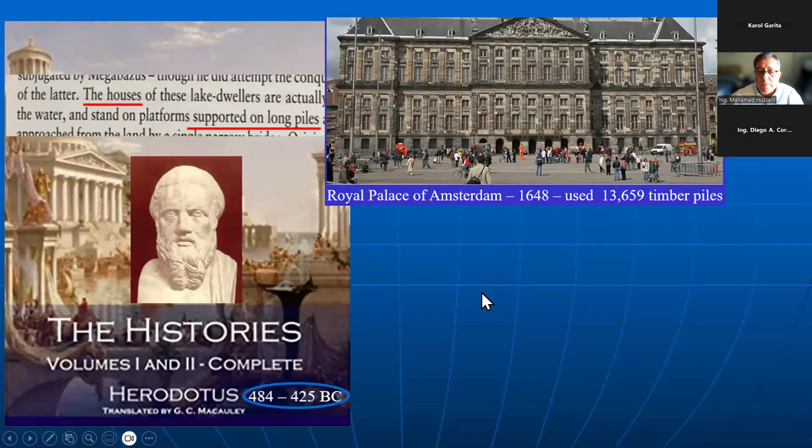Just to give you an idea of the progress we have had in deep foundations over the many years: in 1648, when they built the Royal Palace of Amsterdam, they used 13,659 piles. In 2010, when they built the world's tallest building, 160 floors high, in Dubai, they used only 194 piles. Great progress we are having.

The use of deep foundations in North America is said to have started with the invention of the skyscraper, the high-rise building that was first built in Chicago. This is the very first high-rise building built in Chicago in 1885, 10 stories, a steel frame building, and the foundations for which were hand dug.

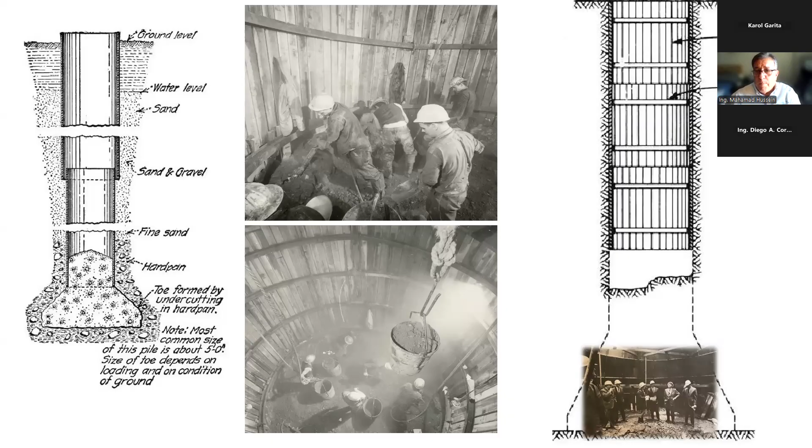They used to send people down into the ground to, by hand, by shovel, dig the foundation and then fill it with concrete. So this is one such foundation where they have an enlargement at the bottom, and they actually had an engineers' meeting, a project progress meeting, held at the bottom of one of these foundations.

In today's practice, we use deep foundations to support all kinds of structures in all types of geotechnical conditions, to resist all kinds of load combinations.

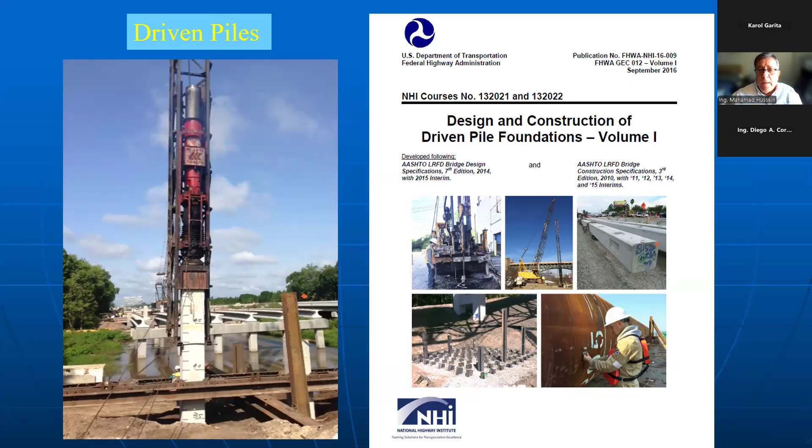They consist of driven piles, and there is a manual in two volumes, Design and Construction of Driven Pile Foundations, issued by the United States federal government, Department of Transportation. This manual was written by engineers in my company, GRL Engineers. They wrote the manual that everybody uses throughout the United States for the design and construction of driven piles.

At the end of the presentation, I will leave you my email address. If you're interested in these manuals, please send me an email and I will send you a link so you can download these manuals for free in PDF form.

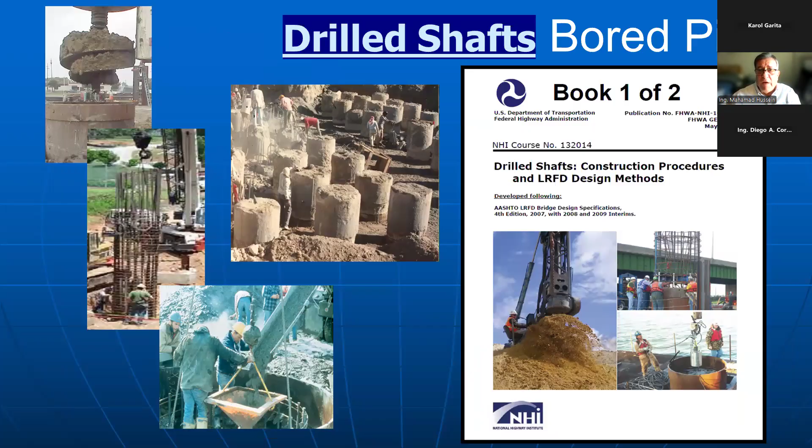So we have driven piles, auger cast piles, cast in situ foundations, for which there is also a design and construction manual I can send to you, as well as drill shafts or bored piles. There's also a manual in 2 volumes for that.

Driven piles typically consist of timber piles, concrete, and steel piles. Timber piles have been used for thousands of years. That's all we used to use for a long time. Now, in today's practice, timber piles are used to support small structures or as a ground improvement technique. There is a manual for the design of timber piles you can download for free from the Timber Piling Council.

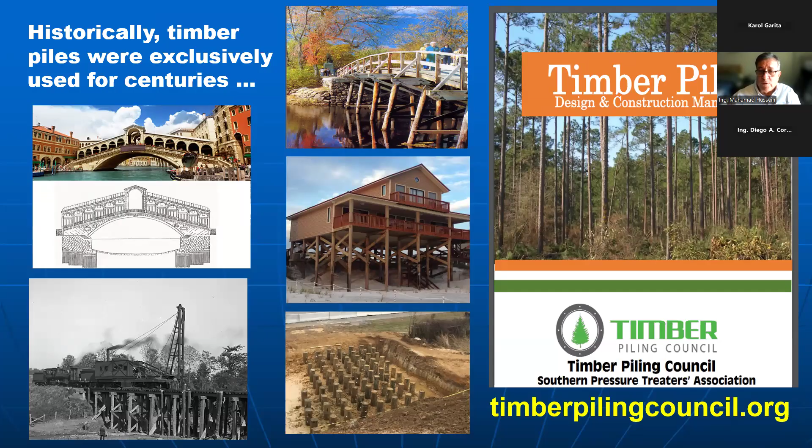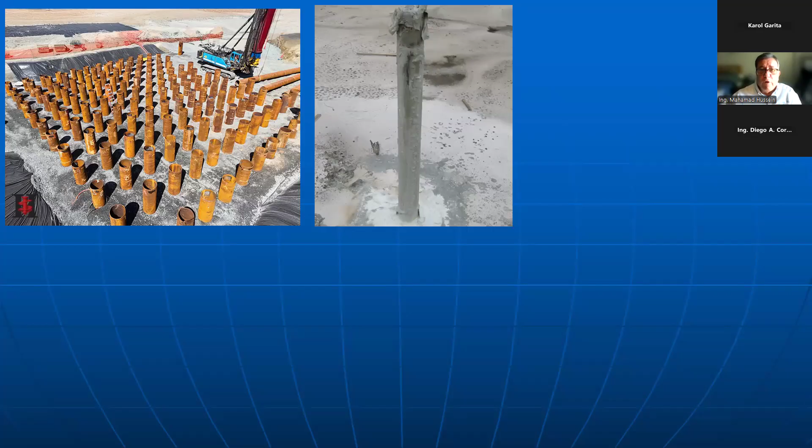Steel piles come in 2 varieties, H-pile and pipe pile. There are about 20 different H-pile sections, profiles, specifically made for foundations. They look like H-beams, but they are not structural H-beams; they are specifically H-piles made for foundation work. Pipe piles come in a variety of sizes, ranging in diameter from a few inches to a foot or two, to a few feet, to maybe more than 10 or 15 feet, depending on the need. So they range in diameter, in wall thickness, and in length.

For example, if you ever come to Florida and go to Disney, the foundations for the monorail piers - one of them went down about 100 meters, 350 feet deep. And also in Florida, we have piles that are 415 feet deep, about 130 meters, pipe pile long.

Pipe piles can be open-ended or closed-ended, and they can be uniform, tapered, or semi-closed-ended. So they can be designed depending on the requirements of the project.

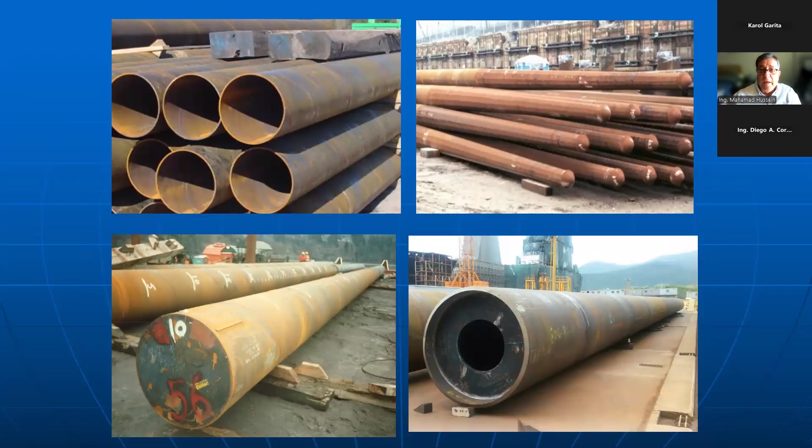One of the main advantages of steel piles is that they can easily be adjusted for depth and length, by welding to add length or by a simple torch to cut off. So if we have variable subsurface conditions, steel piles, H-piles, or pipe piles will be an ideal foundation solution.

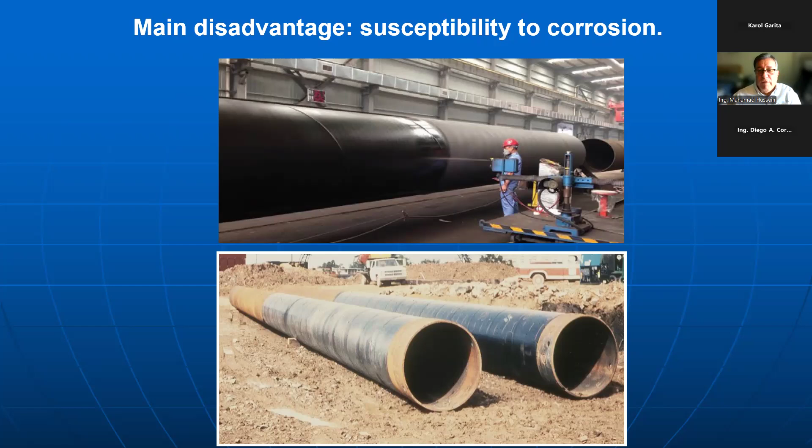The main disadvantage of steel piles is that they're susceptible to corrosion. For that reason, when steel piles are designed, sometimes they are coated with material in order to prolong their service life, and sometimes they also add artificial thickness - making it a little extra in order to account for the corrosion effect. In the manuals there are design tables for how much corrosion to expect and how to protect it with cathodic protection.

For offshore applications, or near shore for ports, harbors, offshore applications, steel piles are exclusively used. Steel pipe piles are exclusively used.

The other kind of piles we have is concrete piles, mainly pre-stressed concrete piles, typically square, pre-stressed concrete piles. We may also have post-tensioned cylindrical concrete piles. The pile will have to be cast in the casting yard and transported to the project site. On the project site, they can also be spliced, either by epoxy dowel splicing or by mechanical splicing.

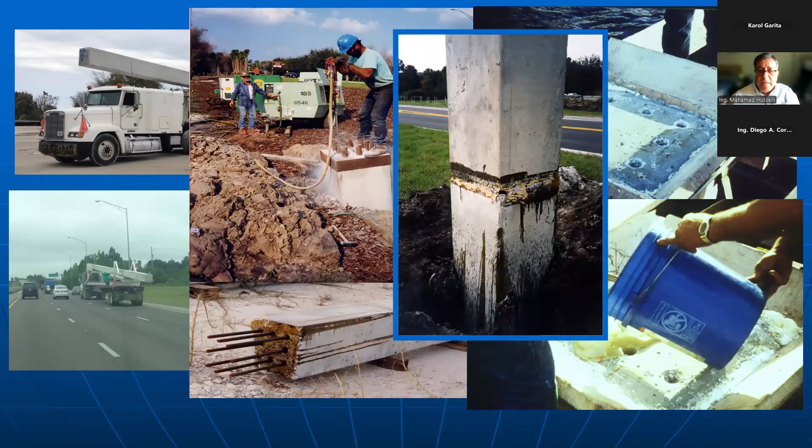If the pile is very large, like more than 24 inches on the side, then they make it hollow in order to reduce the weight so the pile can be handled with ease. There are design manuals specifically from PCI for the design of pre-stressed concrete piles that you can also download.

The newest addition to the use of concrete piles is the utilization of ultra-high performance concrete. This is the very first such pile driven. The strength of this concrete is 4 times the strength of normal concrete.

So while piles may be uniform and prismatic, they don't have to be. They can be highly non-uniform in cross-sectional profile along their length, and they can be composite, made out of more than one material in a variety of combinations.

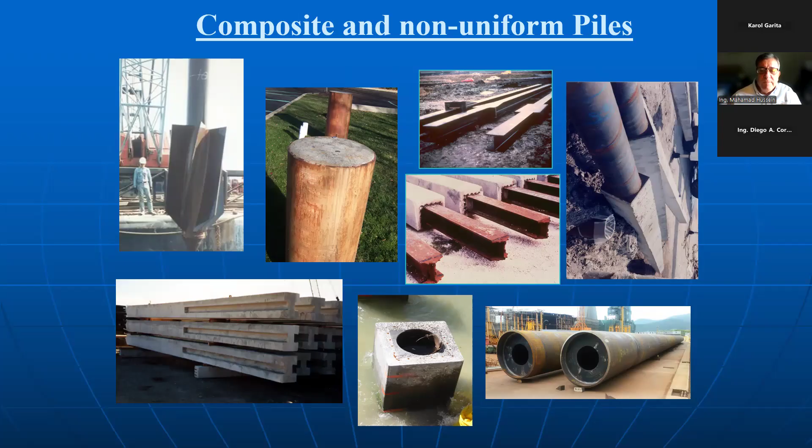There are many different hammer models and types - hydraulic hammers, air steam hammers, diesel hammers, single acting hammers, double acting hammers. There are hundreds of different hammer models available, from the very small to the very large, to drive these various kinds of piles.

So we typically drive piles one pile at a time into a pile group to make a foundation to support a bridge pier, for example, or a building or some kind of structure. To support the building, we need to know the pile's static load bearing capacity - how much static load the pile will be able to support.

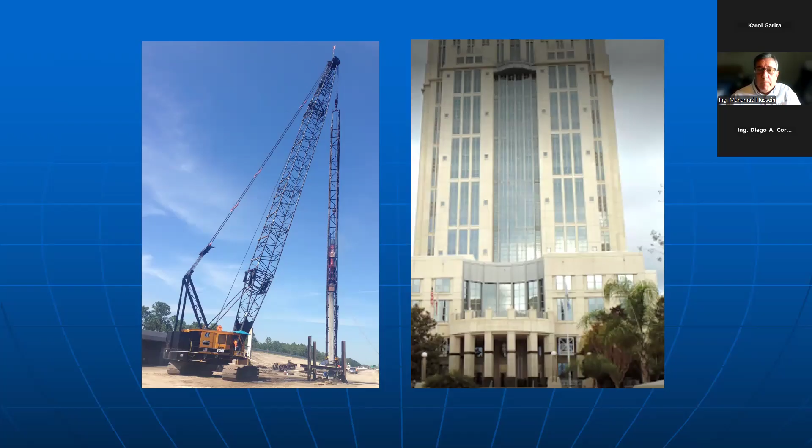The best way to evaluate the static load bearing capacity of a pile is by performing a static load test.

Static load testing can be performed by using dead weight or reaction piles, or a combination of the two, to support the reaction beam. Then we put a hydraulic jack on top of the pile, apply static load, and measure the corresponding pile top movement.

So this is a typical static load test result, load versus movement. Please keep this in mind, remember this, I will bring it up again later.

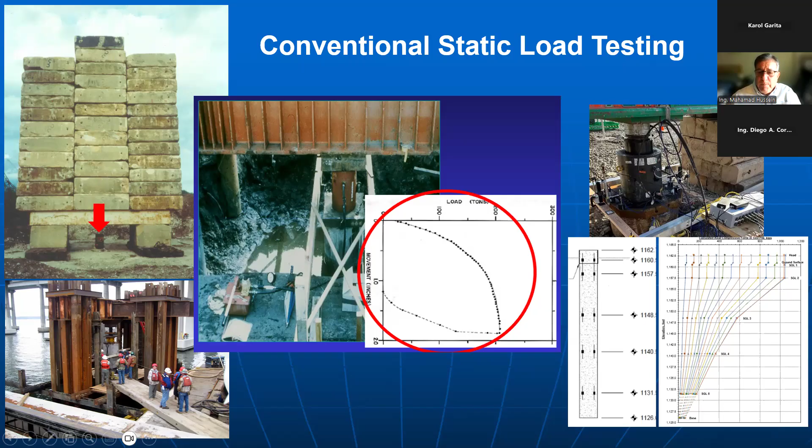To get more information, we may want to put strain gauges along the length of the pile and measure the load transfer between the pile and the soil versus depth. That will allow us to separate how much skin friction we have and how much end-bearing resistance we have during the static load test.

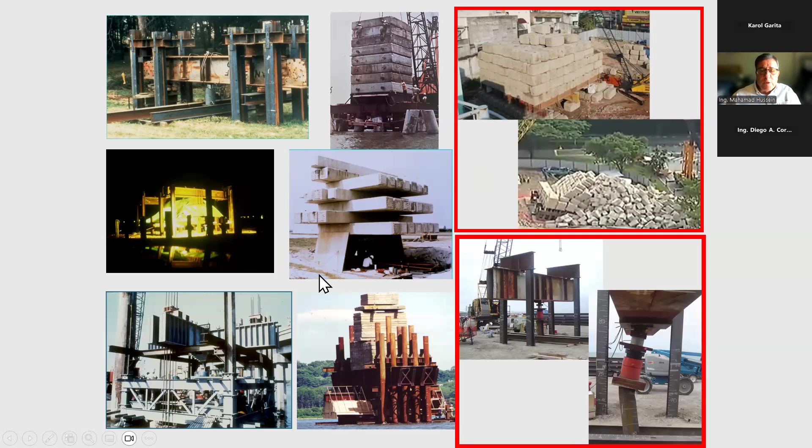This is great, it's the best thing we can do, but it has many limitations. Static load testing costs a lot of money and takes a lot of time to perform. We also have to be mindful of safety when we perform static load testing, whether using dead weight or reaction piles. These are very important limitations, which is why we do not do so much static load testing.

Also, very importantly, when we drive piles into the ground, we do not have much time between driving the pile and building the structure on top of it. So there's not much time to run a static load test. And if the project is over water, static load testing becomes much more expensive.

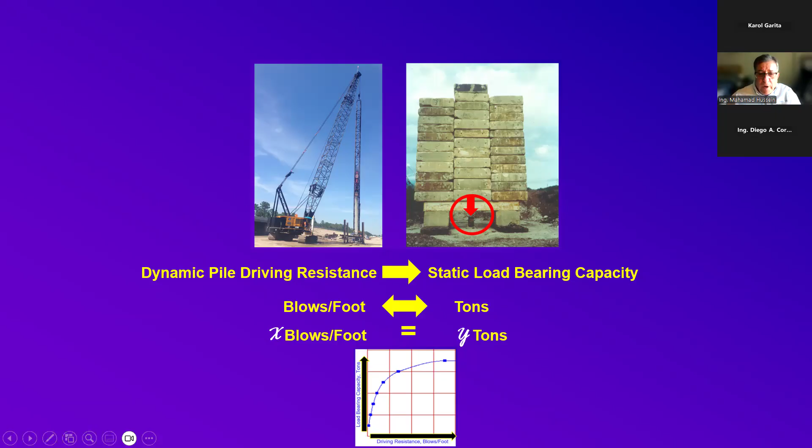So the challenge is: can we obtain the static load bearing capacity of the pile from information during pile driving? Can we relate the static load bearing capacity of the pile to its driving resistance under the hammer? Can we find a relationship between pile driving blow count, blows per foot, and how many tons of static load the pile can take? Can we quantify this non-linear relationship between pile driving blow count and static load bearing capacity?

For a long time, people involved in pile driving realized the relationship between the energy of the hammer, the load of the pile, and the blow count. If it takes a lot of energy, a lot of work to drive a pile into the ground, then the pile will carry more load.

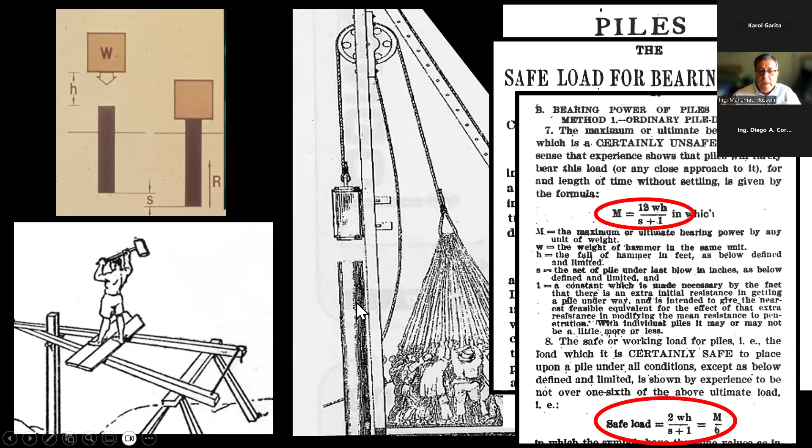Mr. Wellington, in 1888, wrote an article in the Engineering News magazine relating pile load bearing capacity to hammer energy and penetration under the hammer. We call this the ENR formula, ENR approach, or energy approach.

Many people tried to improve on that simple equation. But no matter how much they tried, back in 1888, in the 19th century, we only drove very short timber piles with drop hammers. Now, of course, we have much larger hammers, much longer, flexible, elastic piles, much more complicated lengths, penetration, and high loads. So applying 19th century technology to today's practice is not very effective and is not advised.

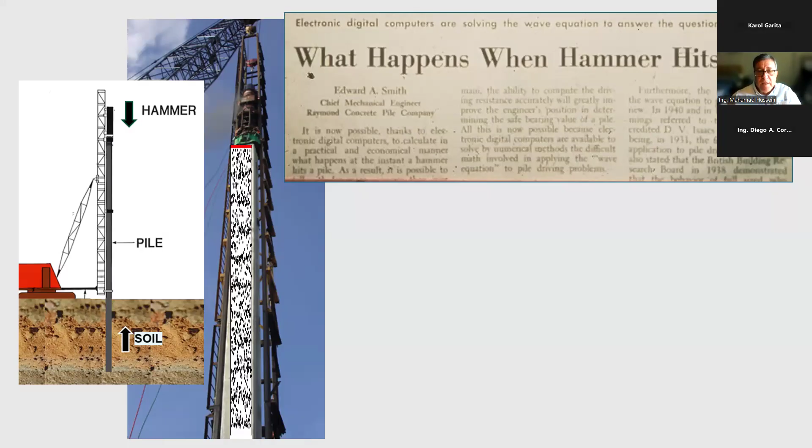So in the 1940s, Mr. Edward Smith, realizing that the dynamics of pile driving under the hammer are better represented by stress wave mechanics, noted that when the hammer impacts the top of the pile, it generates a stress wave that travels down the pile length back and forth very fast, like 5,000 meters per second, inside the pile, but finite.

Mr. Smith wrote a computer program utilizing the wave equation, the second order differential wave equation, to apply to the stress wave in the pile. He called his program the wave equation analysis of pile driving.

This program that Mr. Smith wrote in 1948 is often cited as the first program in civil engineering, the very first program anybody wrote for civil engineering application using the digital computer, for pile driving dynamics.

Mr. Smith wrote the program for use inside his own company only, Raymond Concrete Pile Company. Then the United States government commissioned our group, GRL, to write a public domain program so the public can use wave equation analysis. This program is called GRLWEAP, and it is promoted by the company Pile Dynamics.

Wave equation analysis is a computer simulation program that uses numerical methods to evaluate pile drivability. It's a very powerful program that relates pile driving blow count to pile load bearing capacity. This is good information because we can give that to the pile driving inspector on the job site.

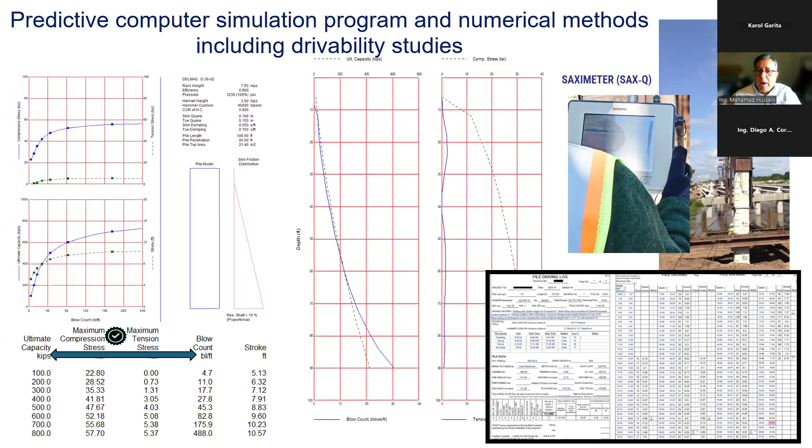The inspector will have a pile driving criteria for blow count, so many blows per meter, to make sure that every pile is driven to the required blow count to achieve the required ultimate load bearing capacity of the pile. They do that utilizing equipment called a saximeter, meter of sound, that listens to the pile driving hammer, and then it tells you blow count and the pile capacity from the criteria.

So while it's a very powerful program, it's a simulation program. It's computer analysis by simulation. It relies on assumptions. The analysis engineer has to assume many parameters to build up the model inside the computer. That is why it has potential sources of error, because it is based on assumptions.

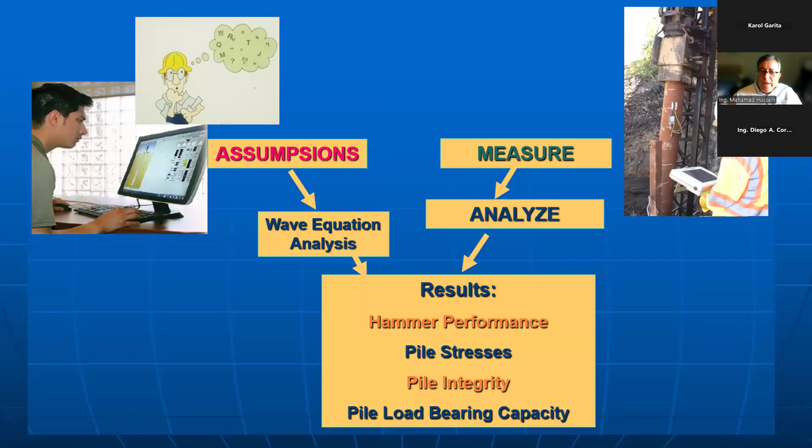So the same engineers who wrote the program thought, what if we take measurements? We go to the job site and perform measurements, and we analyze the measurements instead of assuming parameters and information. So we measure the information we need and we analyze it to come up with the results.

They invented all of the equipment, the sensors, the gauges needed. They invented the computer to analyze the data on the job site, and also they invented the formulas, the equations needed to analyze the measured data. And they showed during the research good correlation between the prediction of static capacity of the pile from dynamic measurements and actual static load test.

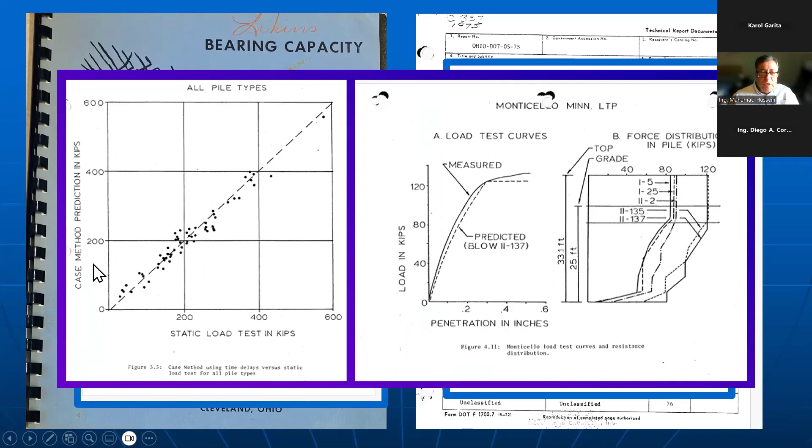Later on, the equipment used during the research had been shrinking down. So now, dynamic testing, 50 years later, is performed all over the world using equipment called Pile Driving Analyzer and software called CAPWAP. CAPWAP is a wave equation analysis that uses measured data from the pile driving analyzer as input. No need for assumptions - we measure what is needed and analyze it on the job site.

So let's start from the beginning. This is static load test. We need all of this dead weight because we need to perform static testing. So what if we were to do it differently?

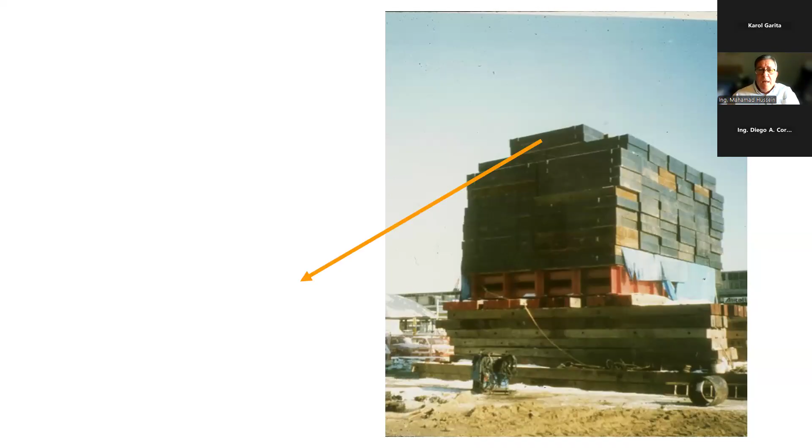If we were to take a small portion of that, a small piece, put it in a guide, lift it up high enough and drop it so that it produces the same load on the pile as all of this weight - that is the difference between static load testing and dynamic load testing.

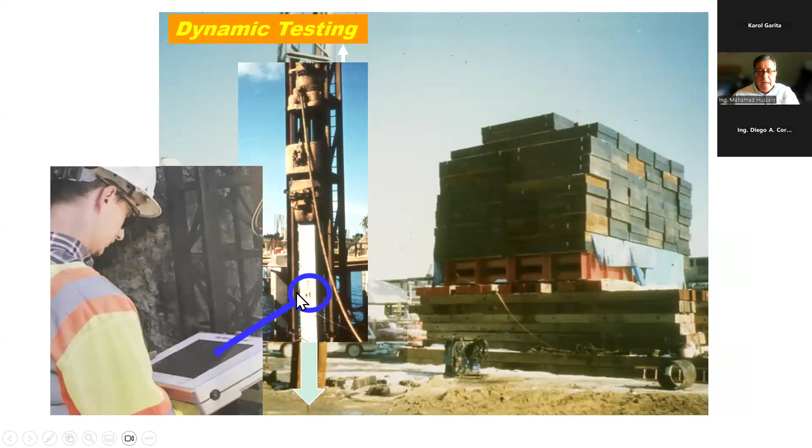The pile driving hammer provides a dynamic test load. So all we have to do is put sensors, put gauges on the pile, and then we can perform dynamic load testing. No need for static testing. We can perform dynamic testing during pile driving.

This is done through ASTM standard D4945. Testing can be performed with a testing engineer standing there on the job site, or it can be done completely remotely using SiteLink technology with a satellite link. The equipment sends the data to the test engineer anywhere in the world in real time during pile driving - remote testing, remotely.

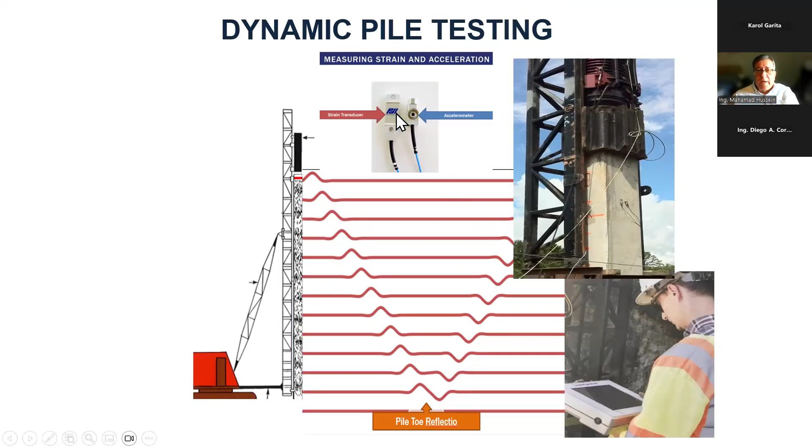So dynamic pile testing is a measurement of load and movement of the pile under the impact of the hammer, and the analysis of these measurements utilizing stress wave mechanics, elastic one-dimensional stress wave mechanics. Load is measured with strain gauge, and movement of the pile is measured with accelerometer. These are very small instruments, only about 10 centimeters, reusable, and they can be attached to any kind of pile - pipe pile, H pile, concrete pile, timber pile, as well as cast-in-place foundations like bored piles or auger cast piles.

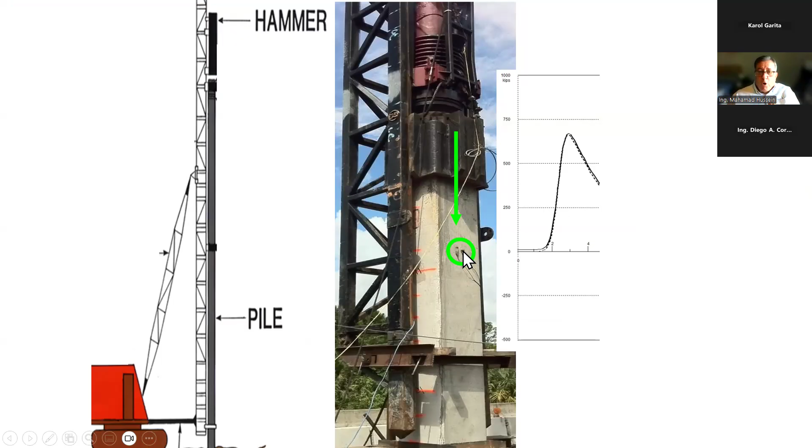When the hammer hits the top of the pile, the stress wave is generated. When the stress wave goes by the gauge location, the gauges sense a quick rise of force and movement of the pile. Then the stress wave travels down the pile length to the bottom, reflects, comes back, and we see the reflection. So this is data from one measurement, one impact, one hammer blow, showing impact and reflection at the pile top. We take this every blow.

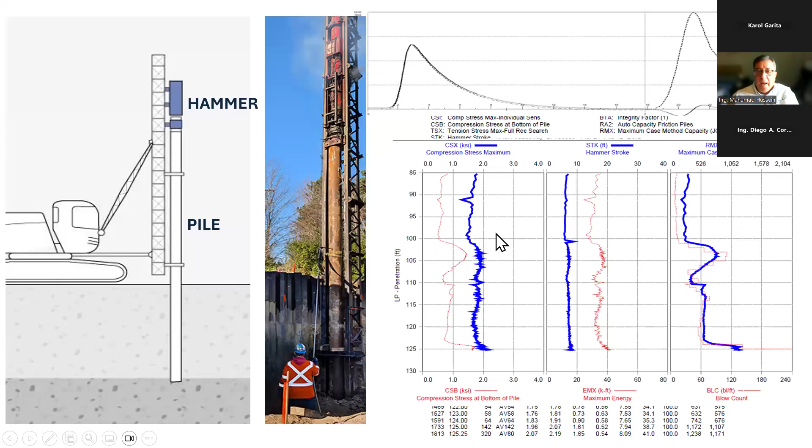These results can be shown in table form, also in graphical form. Versus penetration depth, we see the compression stress on the pile, tension stress, the energy of the hammer, the static load bearing capacity versus depth, and the blow count versus depth. So it is a complete test record during the driving of this one pile, done on the job site in real time during pile driving. The information can be used to analyze the hammer, pile, and soil.

Analyzing the hammer is very important because we measure the energy received by the pile and compare it to the maximum energy of the hammer. We see that this can be highly variable. It can vary—maybe the pile only receives 10%, 20%, 30%, or 80%. It could be anything. So we have to quantify the efficiency of the hammer because we are using the pile driving blow count to evaluate pile capacity.

Why does it vary so much? Why is it so low or so high? That is because it depends on the mechanical condition of the hammer and the state of maintenance of the hammer system and its various components.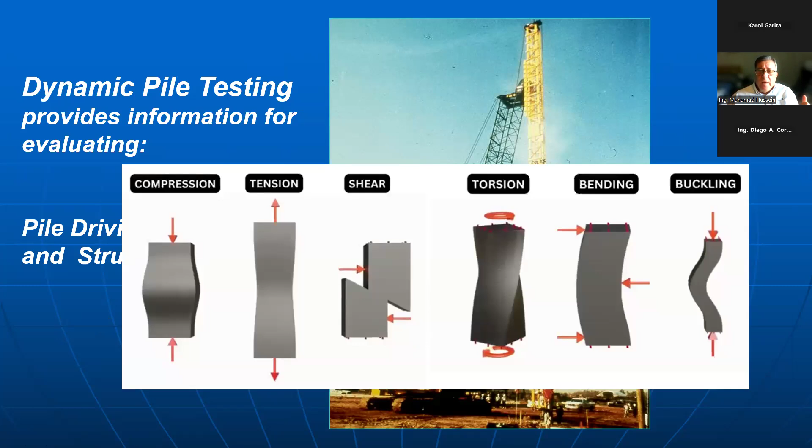When the hammer hits the pile top, the pile undergoes a very complex state of stresses, including compression, tension, shear, torsion, bending—all kinds of stresses. These stresses sometimes damage the piles. Piles may be damaged on the top, but by taking measurements, we are able to measure the stress and limit and eliminate the cause of the damage by reducing the energy of the hammer.

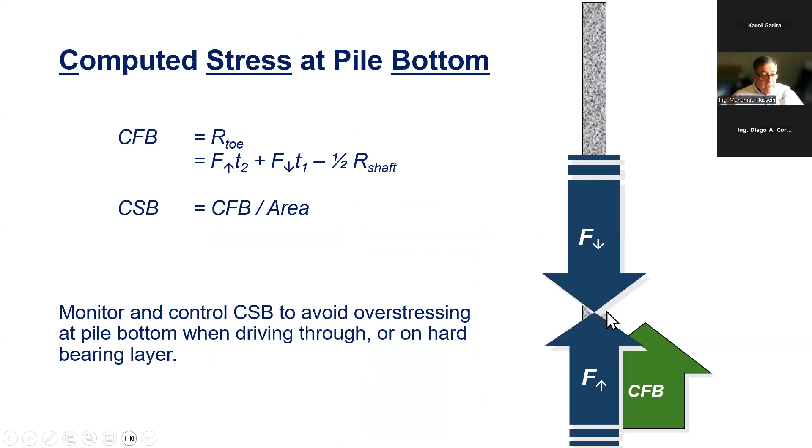So even though it's measurement only on the top of the pile, we can calculate from the top measurements the stress at any location along the pile length, including the bottom, because the bottom of the pile stress may be twice that on top of the pile.

So when we drive piles to a hard layer, notice no damage up on top. But when we extract the pile, we have pile damage at the bottom because of too much stress there, due to end-bearing resistance and reaction in the pile. Also, during easy driving, the pile will have tension stress that may crack concrete piles.

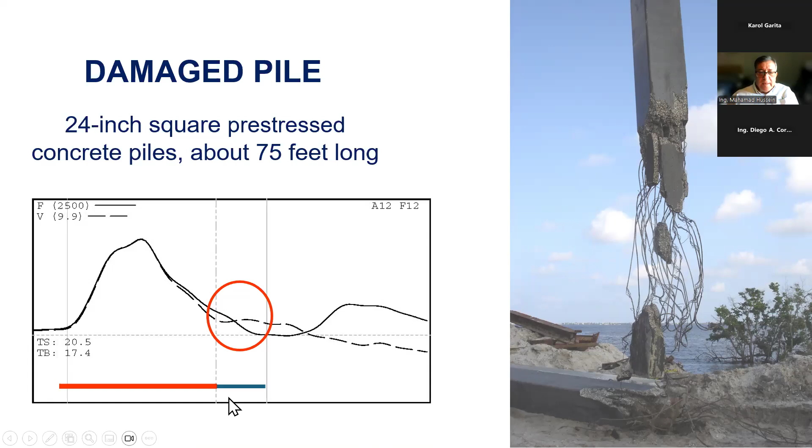So when we have damage on the pile, this will send back reflection that gets registered in the pile top record we measure with the PDA. Early reflection in the data indicates damage on the pile. Here we see concrete pile damage, and here we see steel pile damage. So the PDA, the pile driving analyzer, will calculate the location of the damage and the amount of the damage along the pile length.

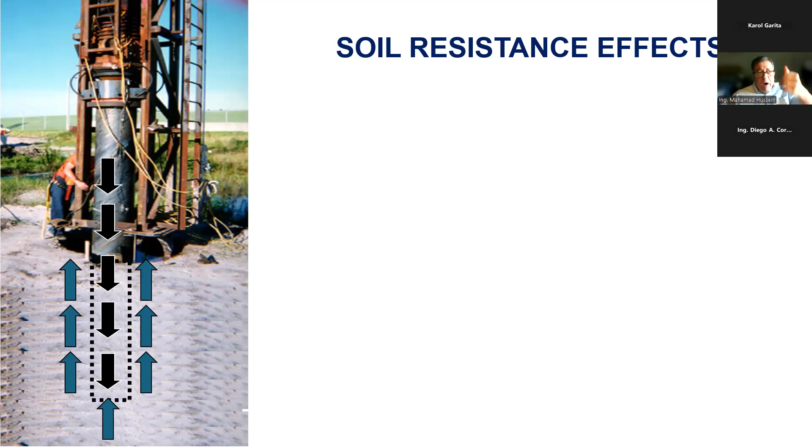So we talked about hammer performance and pile performance. Now, soil performance. When the hammer impacts the pile, the pile moves in the ground, and the pile movement activates soil resistances. So now we have two waves on the pile: the wave going down from the hammer, and the wave going up from the soil. Both of these waves are measured at the gauges by the PDA.

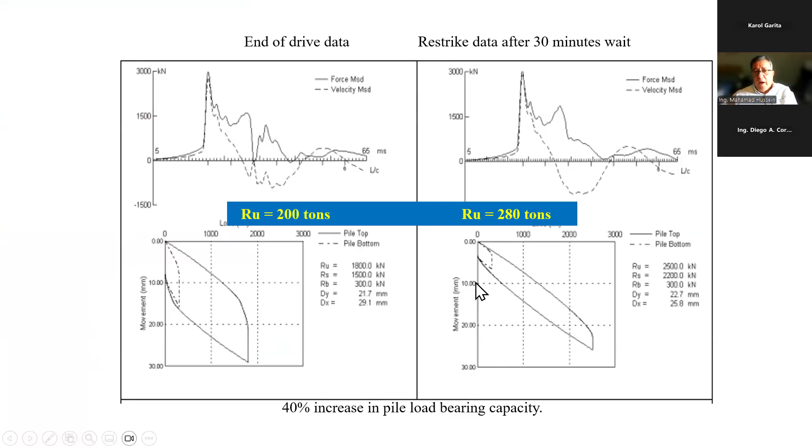So the PDA, under each hammer blow, measures the wave going down the pile from the hammer and the wave going up the pile from the soil. From these reflections of the stress waves of the soil resistances, we are able to resolve them into skin friction distribution along the pile length and end-bearing resistance during pile driving under each hammer blow. Testing can be done during initial driving and later in restrike to study the setup effect—increase of pile capacity with time, setup, or decrease of pile capacity with time.

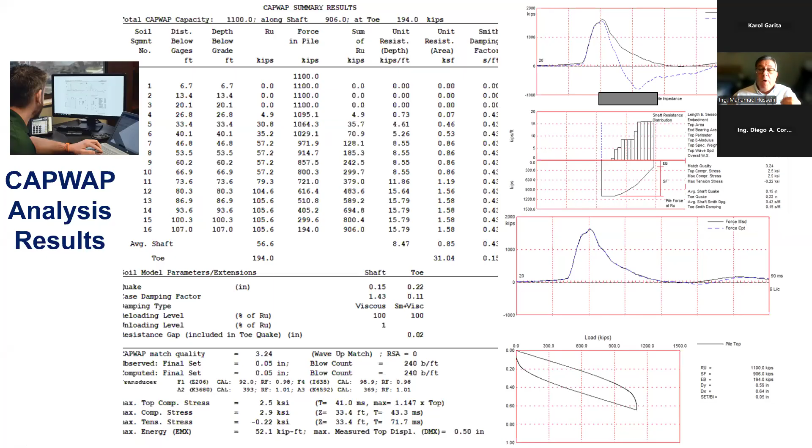It's called relaxation. We can then put the measured data from the PDA into the CAPWAP analysis software program, which uses a sophisticated pile-soil interaction model with signal matching analysis technique to come up with the skin friction distribution along the pile length, and then we can simulate load versus movement. Remember, I mentioned we would talk about load versus movement—now it is not from load testing, but from dynamic measurements.

So under the impact of the hammer, measurement with the PDA and analysis with CAPWAP, we can simulate load versus movement, load test. How good is that? How does that compare to full-scale load test?

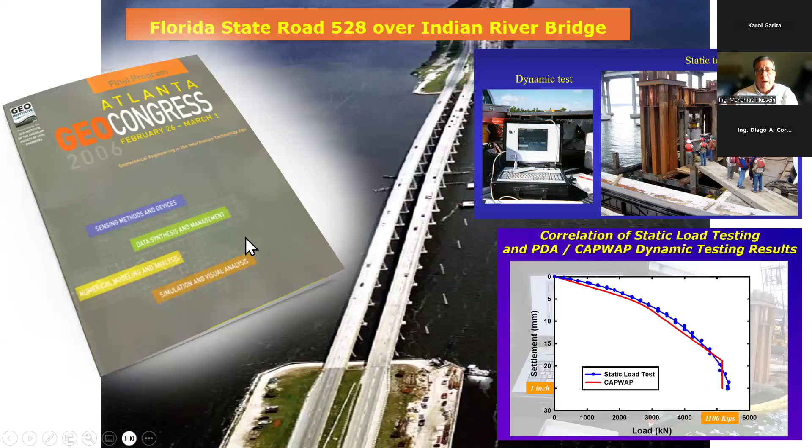There have been many studies. This is a case history paper published by ASCE showing excellent correlation. And this is another paper, also published by ASCE, also showing excellent correlation between simulation from PDA measurement and actual static load test.

So engineers can use dynamic testing on a test pile program on a few piles at the beginning of the project in order to establish production pile length for the job, establish production pile driving criteria, also to check on the engineer's design assumptions, and also to check the contractor's equipment and means and methods.

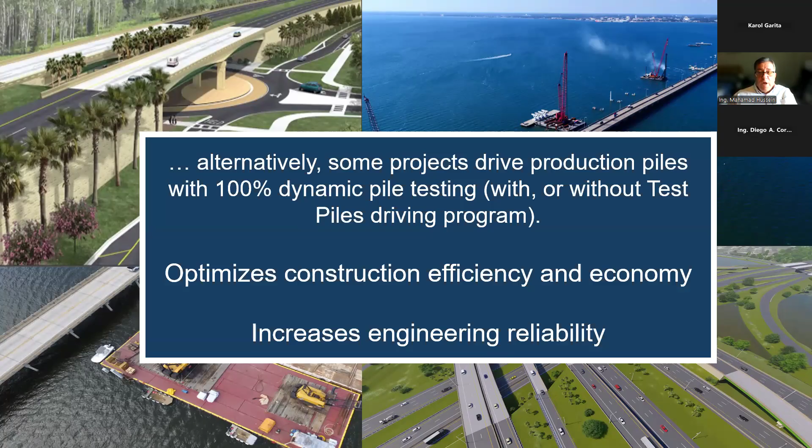Alternatively, recently projects are now using 100% testing. Every pile on the project is tested with PDA. The state of Florida now, every pile for the highway department is tested 100%, every pile on the project. They found that it optimizes construction efficiency and economy and increases engineering reliability.

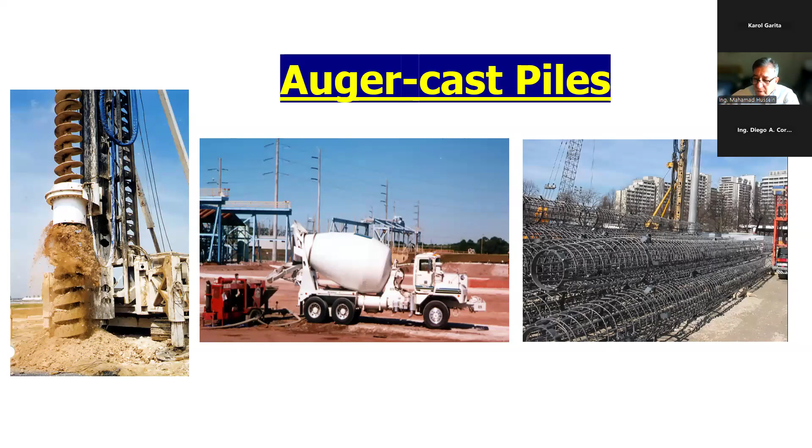Dynamic testing can also be used on other kinds of deep foundations, not only driven piles with a hammer, but also helical piles or micro piles. All we have to do is bring in a drop hammer and hit the pile to perform dynamic load testing, including testing of cast-in-situ foundations, cast-in-place deep foundations, including auger cast piles that are used now to support buildings and bridges - all kinds of foundations, auger cast piles.

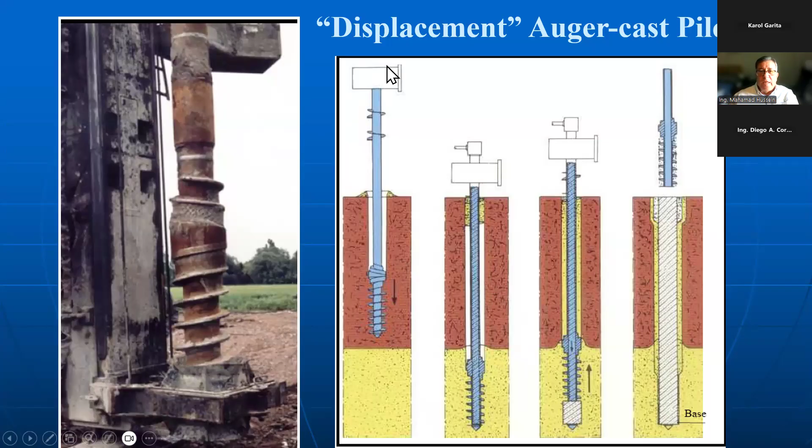They're constructed using a continuous flight, hollow stem auger, by drilling the hole in the ground, filling with grout, and pushing in the steel cage, or by using equipment where we displace the soil in the ground - a displacement kind of cast-in-place auger cast pile. The equipment to construct these piles is fitted with instrumentation during pile installation that measures the grout volume, the auger depth, grout pressure, and torque, in order to make sure that every pile is constructed properly.

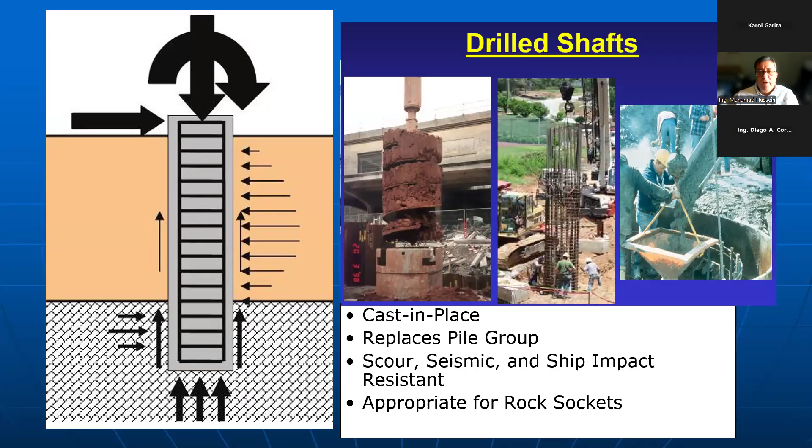Drilled shafts are another type of deep foundation, cast in place, typically very large - maybe 1, 2, 3, 4 meters in diameter, 25, 50 meters deep. They are usually used to support very large structures and very heavy loads in axial loading and also in lateral loading. The beginning of using drilled shaft foundations started in the 1930s in Texas as an outgrowth of the oil industry.

So they take one auger and drill a hole in the ground looking for oil. If they find oil, great. If no oil, then they fill it with concrete and make it a foundation. The Texas Highway Department started using this for their bridges in the 1950s. In Florida, they started using drilled shafts for bridges after the first bridge in Florida collapsed from ship impact.

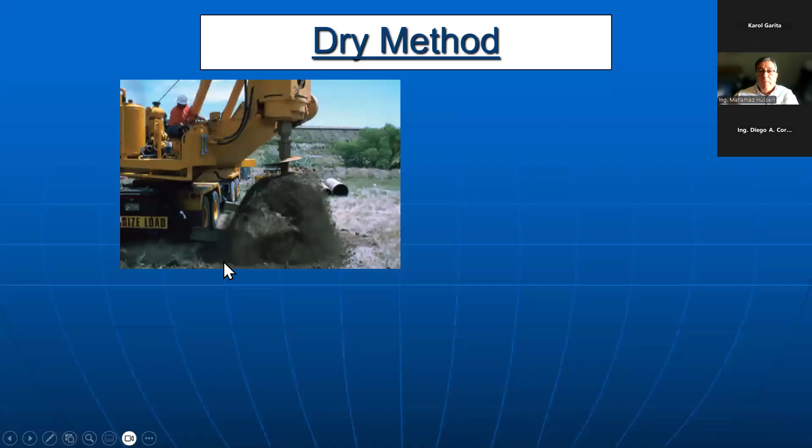So if the water table is very low, we can drill a hole, look down it, put in a steel cage, and fill with concrete. If the water table is high, we have to use steel casing, steel pipe, either temporarily during construction or permanently as part of the constructed shaft. Or maybe we use slurry - a heavy liquid we put in the hole to exert hydrostatic lateral pressure so the wall of the hole does not fall during construction of the drilled shaft.

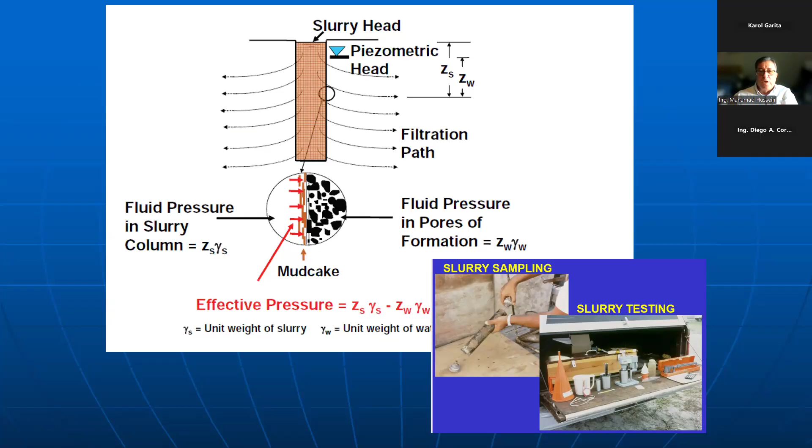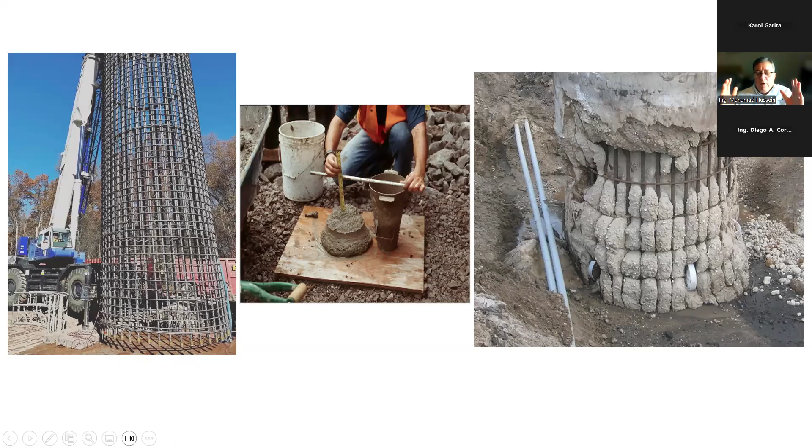So now we have a hole full of slurry, and we have to fill it with concrete. We do that from the bottom up. For that, we use a tremie pipe - very long, the length of the pile. We take it all the way down and fill it with concrete from the bottom, and we collect the displaced slurry on top. The bottom of the tremie pipe must always be inside the concrete. If it goes outside the concrete, we will have a problem with the integrity of the shaft. The steel cage and the concrete have to be designed so that the concrete will go through the steel cage in order to engage the side of the hole, giving us geotechnical skin friction resistance.

So when we drill the hole, we have to inspect it. We have to inspect the hole for the profile of the drilled hole and the verticality, the plumbness - we have to drill a perfectly plumb hole. We also have to check for the cleanliness and the competency of the bottom of the hole for end-bearing resistance. We do all of these inspections before we put the steel cage in the hole and before we put in the concrete.

The hole profile and verticality are checked with equipment called SHAPE, per ASTM standard D8232. SHAPE is electronic equipment that we send down into the hole, even inside the slurry.

We send it into the hole. It sends out signals and waits for reflections, allowing us to draw a 3D picture of the drilled hole, showing the verticality or off-plumbness and the offset between the bottom and top of the hole, to make sure it is within design tolerance. It will also calculate the volume of the drilled hole.

This is very important because later on, when we put concrete in the hole, we have to make sure that the volume of concrete we use equals the actual volume of the drilled hole, not the theoretical hole, but the actual hole as we drilled it. Very important.

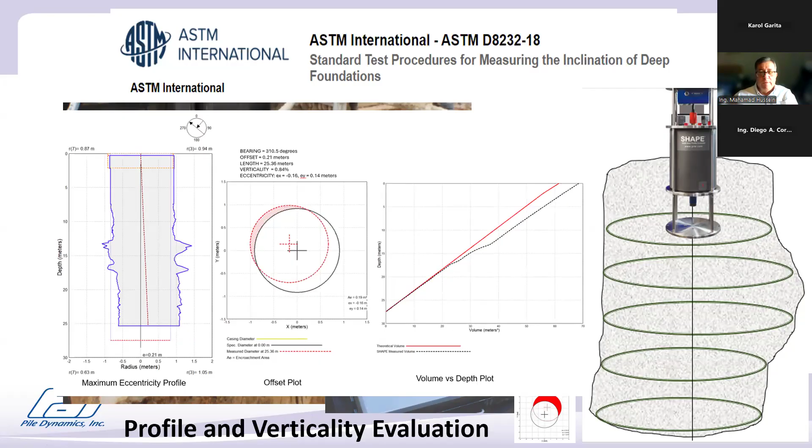We also measure the cleanliness and competency of the bottom of the hole, to make sure we do not have loose material or debris that would affect end bearing of the drilled shaft. We do this inspection with equipment called SQUID, Shaft Quantitative Inspection Device. It has three small penetrometers that we push into the bottom to measure the thickness, strength, and stiffness of the material, ensuring the bottom of the shaft is clean enough to allow for end bearing.

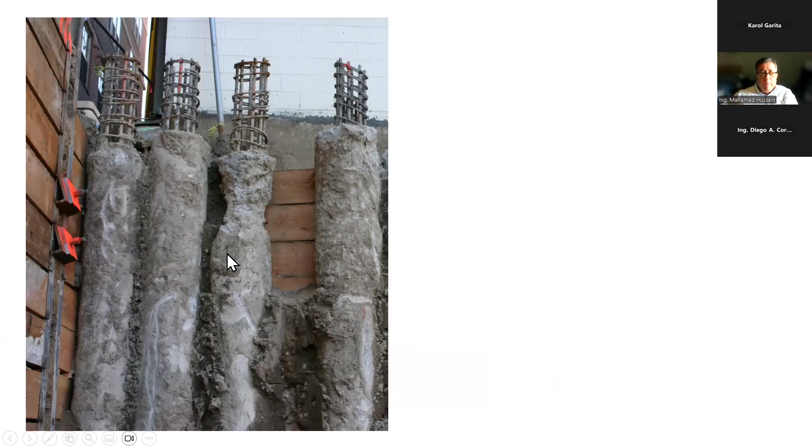So we do the inspections and the construction, and the constructed shaft may be perfect, or maybe good enough, but sometimes it will have serious problems. So now we have to check for integrity. There are many factors that affect the integrity of a constructed shaft in the ground, including subsurface conditions, design, installation methods, and workmanship.

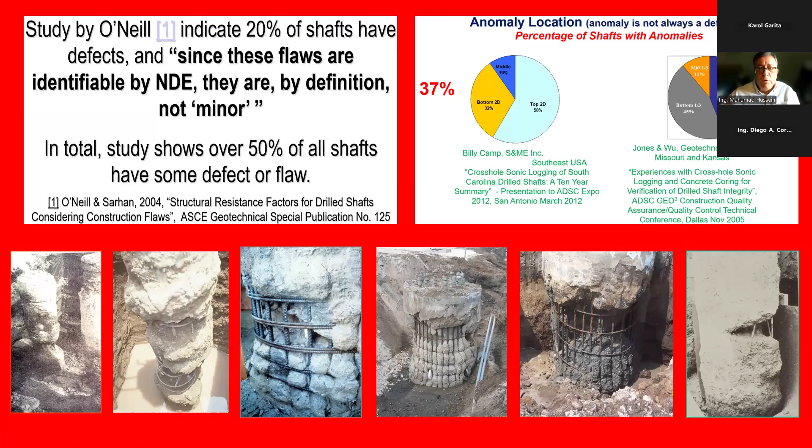Very important. There have been many studies done all over the United States by universities, highway departments, agencies, owners, and consultants, and they found that many of these deep foundations in place have some kind of structural issue.

The oldest method, maybe 50 years old now, to test for integrity is PIT, low strain pile integrity testing, ASTM standard D5882. That uses the impact of a small hammer to send a low intensity, low strain wave down the shaft and back up. We measure on top of the shaft the impact and the reflection from the bottom of the shaft.

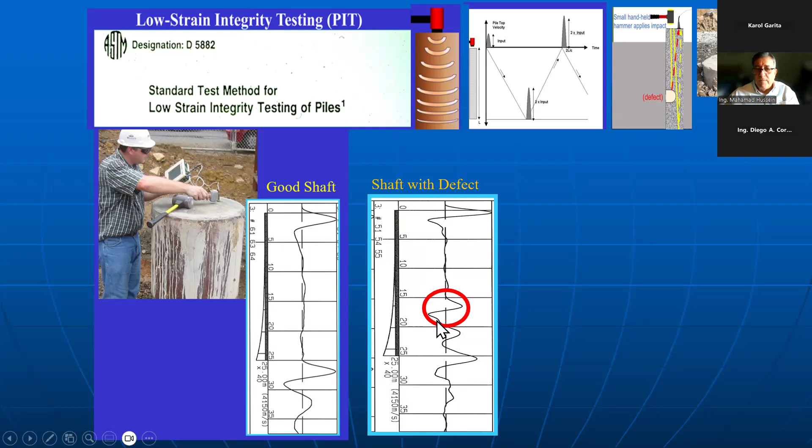This is impact and reflection from the bottom of a shaft 25 meters long. Good data means a good shaft. This data is not so good, and the shaft has a defect at 15 meters, out of a total shaft length of 25 meters. At 15 meters we have a reflection indicating a defect. We can analyze this data and try to quantify the location of the defect along the length of the shaft. This is the first technology, the first testing for integrity assessment.

Very old, and it has many limitations.

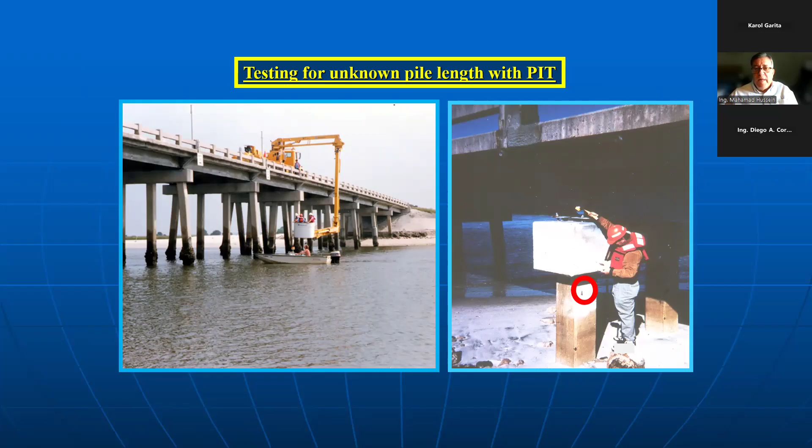This type of testing can also be performed to determine the unknown length of piles already in service, for example for scour studies, load rating, or bridges and buildings where the pile foundation length is not known. You have maybe a 50-50 chance of having good data, for many reasons and limitations.

The next test method is called CSL, cross-hole sonic logging. It's much better than the previous PIT method, but more involved. To perform this ultrasonic test, CSL, ASTM D6760, we have to cast access tubes, 1.5 inch diameter, into the shaft. Then we need equipment: a transmitter and receiver so we can scan, a depth encoder, and the equipment and engineer on the job site.

So we cast these small diameter steel access tubes into the steel of the shaft, and then we take them two at a time, sending a signal from one and receiving it at the other. We scan between these two tubes, many scans between pairs of tubes. The number of scans we can have is n squared minus n, over 2, where n is the number of tubes. So for a 5-tube shaft, we can do 10 profiles.

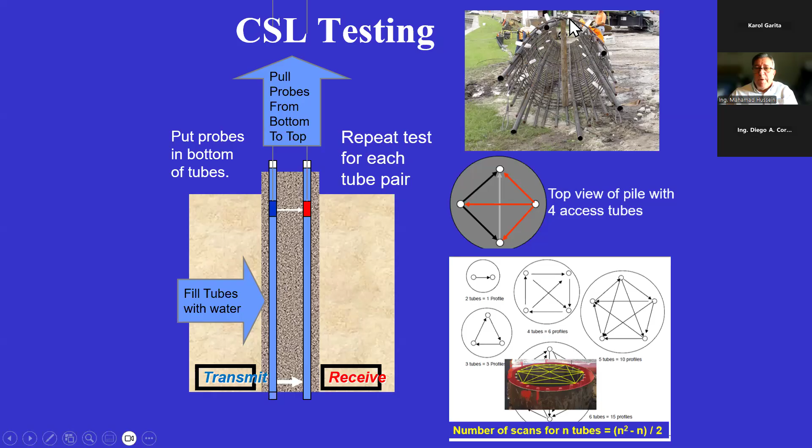The number of tubes needed equals the diameter of the shaft in feet. A 5-foot diameter shaft needs 5 tubes. So when we send the signal from one tube to another, we receive it in that tube.

If we have good concrete, the signal is received well. If we have a defect between the tubes at a certain depth, that defect will delay the signal and weaken the energy. We send signals every 5 centimeters.

So we may have a shaft that is 25 meters long. Every 5 centimeters, we send a signal, so we can stack them. We put the signals, color coded green and black, on top of each other.

So this is the result of the CSL test on the left-hand side between these two tubes. This shaft has 4 tubes, so we take 2 tubes, and this is a scan between the 2 tubes. Good looking data, no problem.

The data in the middle, between the other tubes, shows we have a defect in the middle of the shaft, and on the right-hand side we show that we have a defect at the bottom of the shaft between those 2 tubes. So between the various tubes, we see where we have defects at what depth.

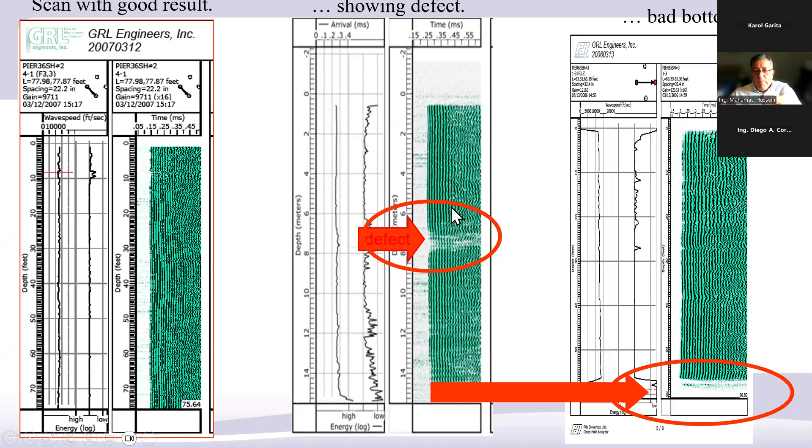We can put all of this data from different tube scans into a 3D tomography program that will show us the 3D picture of the defects inside the drill shaft, inside the steel cage of the drill shaft. So much improved over the PIT method.

However, it has its limitations. We have to wait maybe 5 days or more for the concrete to cure, otherwise we will have bad data.

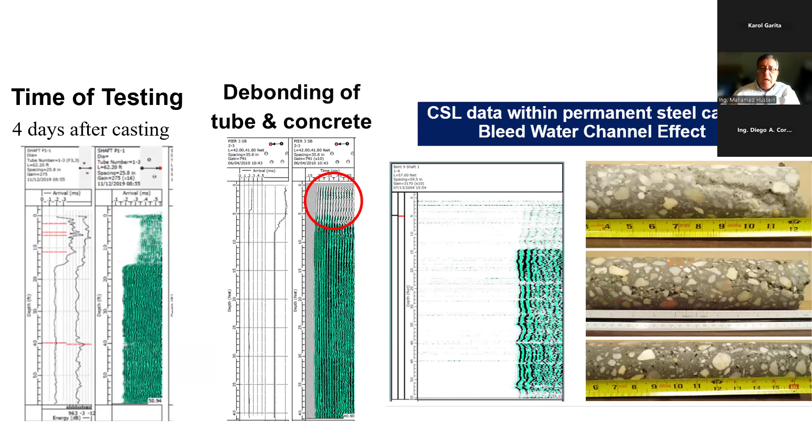The access tubes we need for the test may debond from the concrete, and that will give us bad data. If we use steel casing, that will also give us bad data. Many reasons to have bad data with this test.

Also, this test will only see defects inside the steel cage. So this is a styrofoam defect we put inside, and then we put concrete and test with CSL, we can see it inside. But if we put the defect outside, we cannot see it in the CSL test.

So, many limitations. The newest method for integrity testing is the thermal integrity profiling. This is the best method for integrity testing of bore piles and drill shafts, ASTM standard D7949. The Thermal Integrity Profiling (TIP) method relies on the measurement of the temperature of the concrete inside the ground,

inside the drill shaft, during the curing process. The temperature is measured using a thermal wire that is attached along the length of the reinforcing steel cage. Every 30 centimeters, every foot, we measure temperature, and we put many wires around it.

The number of wires needed equals the diameter of the shaft in feet. So for a 4-foot diameter shaft, a 1.2 meter diameter shaft, we need 4 wires. And we take measurements around the shaft and versus depth.

We know that because of the chemical reaction, the cementation reaction of the concrete generates heat. This heat can be very, very high, 2 times, 3 times the temperature of the ground. So we can get the heat signature profile of the shaft that we can use for assessment of integrity.

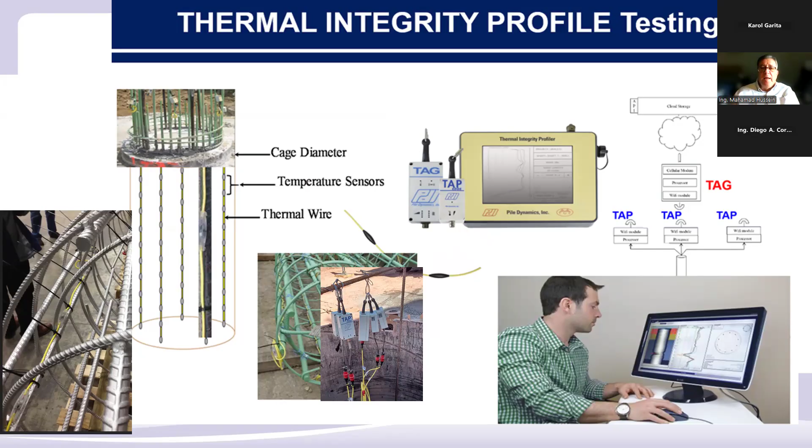So if we have a drill shaft and we have a localized defect at a certain location, it will produce a localized reduction of temperature. If there is no reduction, then the temperature is not changed. If the concrete changes, then the temperature changes also. So a localized defect will produce a localized reduction of temperature.

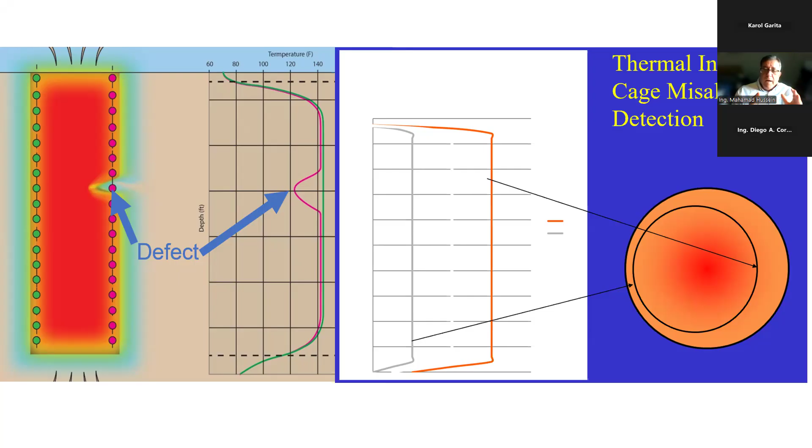Furthermore, if we compare the temperatures along the length of the shaft on one side of the steel cage to the other, and we see that one side always has more temperature than the other side, this will tell us that the steel cage has shifted inside the concrete, because one side is hotter where it's closer to the center, and the other side is cooler, closer to the soil.

So from this information, we are able to draw a 3D picture of the concrete profile, the defects, and also the location of the steel cage inside the concrete, to make sure that we have enough cover.

The same temperature measurements can also be used to assess and evaluate the integrity of barrettes and diaphragm walls in the ground. This technology of using temperature measurements to evaluate integrity of deep foundations is so innovative that it had won many innovation awards from ASCE, DFI, and many organizations in the United States.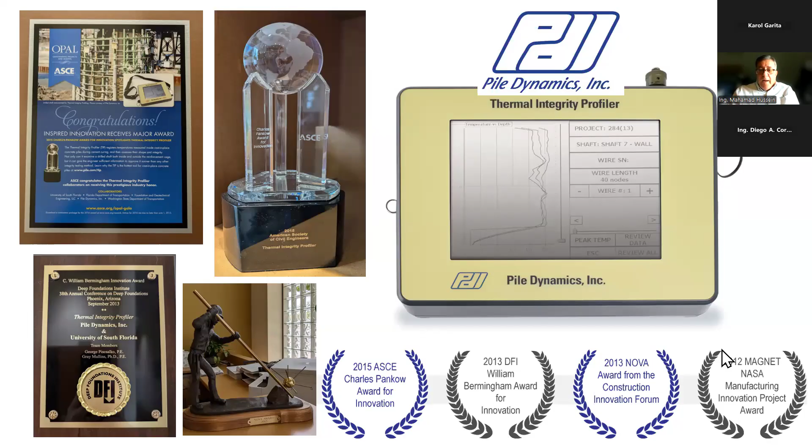So we talked about integrity testing, low strain testing with a small hammer. Small hammer impact will tell us something about integrity, but nothing about load-bearing capacity. To test for load-bearing capacity, we need to perform high-strain testing.

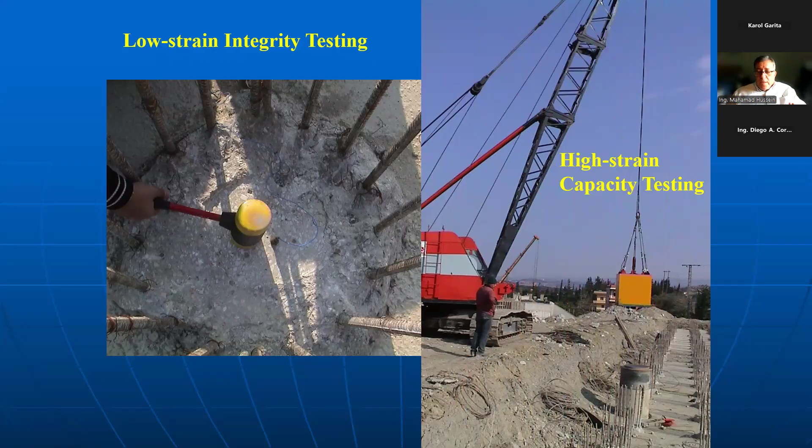To perform high-strain testing, we need a bigger hammer, big enough to impact the bored pile and move it against soil resistance so we can measure load-bearing capacity. How big should the hammer be? It depends on the size of the bored pile and the load. The drop hammer weight we need is equal to 2% of the load we are trying to test. If we have to test this pile to 1,000 tons, we need a 20-ton drop hammer.

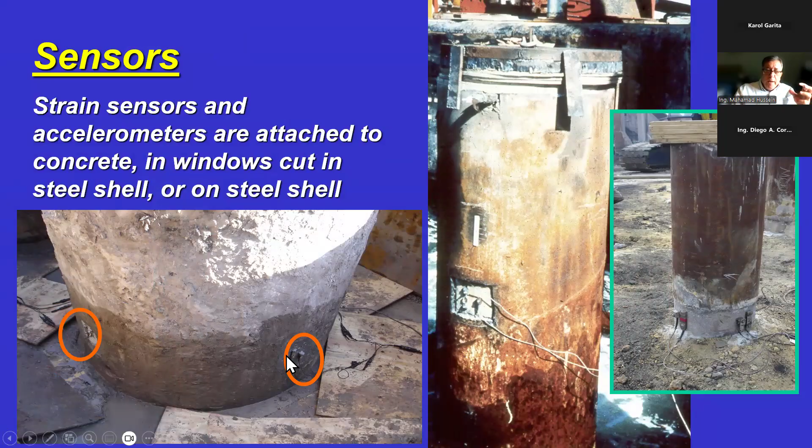So we can bring in a drop hammer and put instruments on the pile, or we can use a load cell. We can attach the accelerometer and the strain gauge. We can measure load and movement like we do with the pile, or we can put a load cell under the hammer on top of the drill shaft or bored pile and take measurements.

So we can perform dynamic measurements by hitting the bored pile or cast-in-place foundation with a drop hammer. That allows us to measure the wave going down the pile and the wave going up the pile with the PDA, and do dynamic testing.

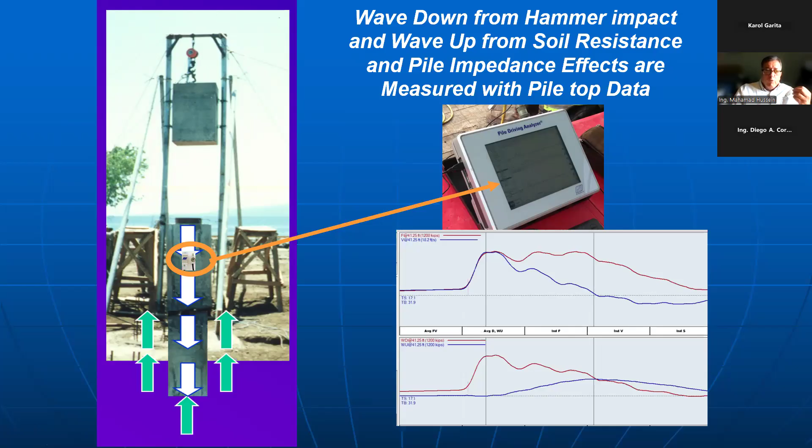This is an excellent picture because it shows that this contractor was required to perform a load test on this bored pile, drill shaft. He decided to perform dynamic testing, not static testing. He knows the weight of the hammer is 2% of the load, so he manufactured the hammer on the job site using the same concrete, and made this drop mechanism to perform the testing. He performed this load test on the job site for practically no cost, very little cost, very economical to perform this dynamic testing on the drill shaft.

So when we have a drill shaft and we impact it with the hammer, we have reflection from soil resistance. We also have reflection from the shaft being non-uniform. So non-uniformity of the shaft will also send back wave reflections. What we're going to do is take the profile of the shaft from the thermal wire and put it as input into the program, so that way we can account for the non-uniformity of the shaft when we analyze the soil resistances for more accurate analysis.

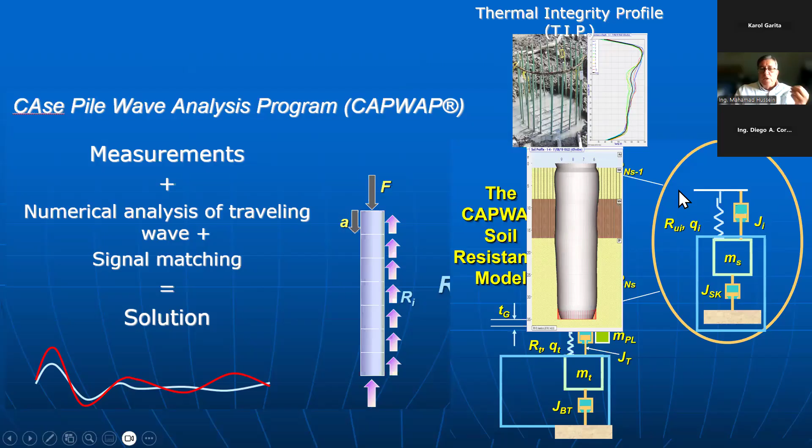So we can then use the dynamic test by drop hammer on the drill shaft, using the profile of the shaft from the thermal measurement, to come up with load movement of the drill shaft simulated by dynamic measurements, without having to perform static load testing.

So this is static load testing, conventional shaft-top static load testing, ASTM standard D1143. We need to put this reaction beam because we need to put this hydraulic jack on top of the pile, on top of the shaft, to perform top-down static load testing, conventional testing, in order to obtain load versus movement. That is why we need so much dead weight or so many reaction piles to hold the reaction beam in place to perform conventional static load testing.

A very smart professor, Professor Jorj Osterberg, invented a method to put the hydraulic jack at the bottom of the drill shaft. He called it the O-cell, the Osterberg cell, or Professor Osterberg load cell. That way, we do not have to have reaction weight. We only put the load cell on the bottom of the drill shaft.

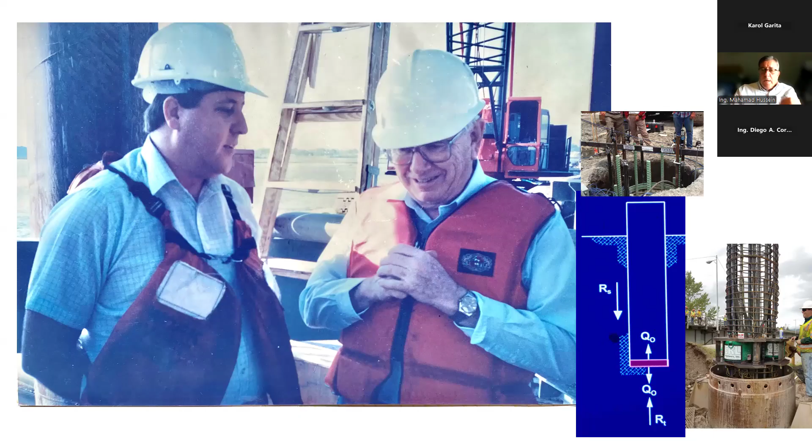Professor Osterberg passed away, and the patent on his invention expired. So now we do not call the test the O-cell test anymore. We call it bidirectional static testing, ASTM standard D8169, bidirectional static testing.

This engineer is performing a static load test, full-scale static load test on this drill shaft. Nothing up there, everything is in the ground. So this is how this test is performed.

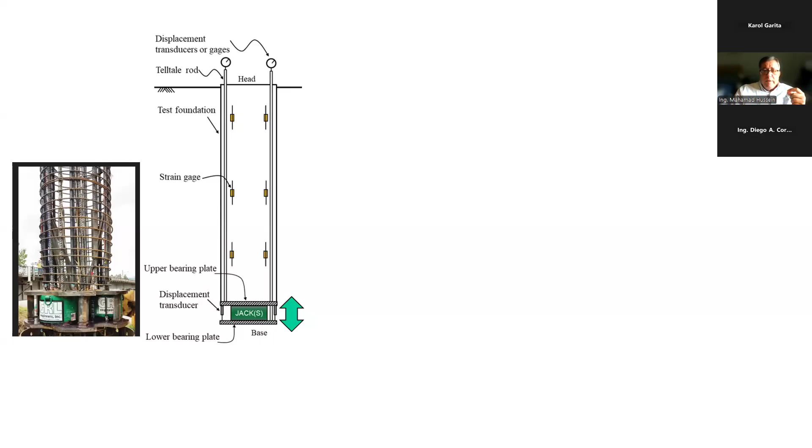We put the hydraulic jack at the bottom of the shaft and apply load. Then we measure movement of the shaft: up in skin friction, and down in end bearing. We apply load on the x-axis, and we measure movement up in skin friction and movement down in end bearing. We apply more load, we measure more movement.

We apply more load, we get more movement until either skin friction is fully mobilized and fails, or end bearing fails. In this case, skin friction failed. At this time, the test is finished.

Therefore, the maximum load we can use this testing for is equal to 2 times the minimum of skin friction or end bearing. That is why sometimes they move the location of this load cell into the body of the shaft, in order to have more load to test for: skin friction above, skin friction and end bearing below, to have more load to test to.

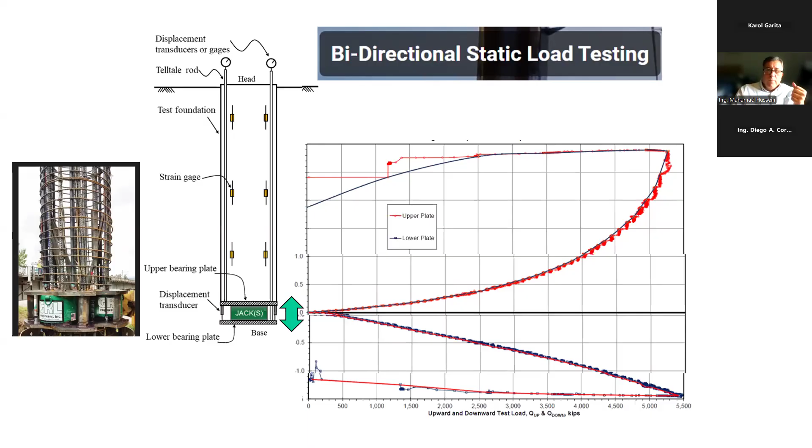We can take this data, the measurements at the bottom of load versus movement in skin friction, load versus movement in end bearing, and convert it into an equivalent shaft-top conventional loading by simulation. So from the measurement at the bottom, we can simulate a load test as if we had loaded the shaft conventionally from the top using reaction weights.

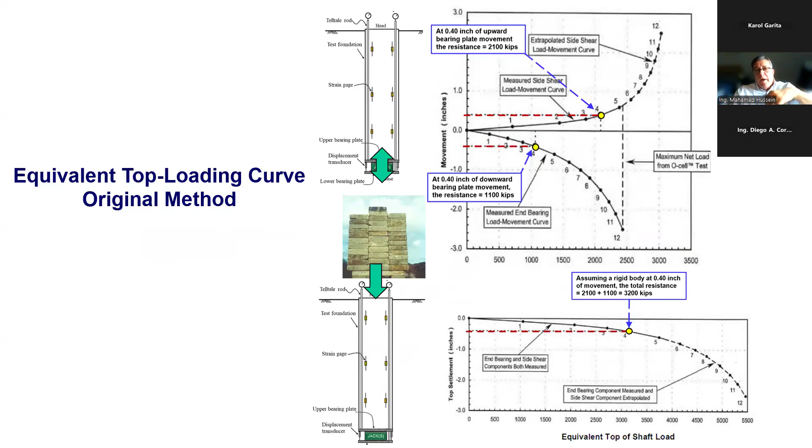So whether we perform dynamic testing with a drop hammer, full-scale static load testing with reaction weights, or bidirectional load testing on these bored piles or drill shafts, the drill shaft has to be instrumented with thermal wire, because we need to know the actual profile of the shaft in the ground, not the theoretical shape, in order to make sense of the load test data.

All of these tests I explained today are widely available in standards, codes, specifications, textbooks, reference books, conference proceedings, academic dissertations, theses, and technical papers. There's much information out there on the basic principles, applications, limitations, and use of all of these test methods I described to you today.

These test methods are all manufactured by Pile Dynamics and are used by GRL engineers. We are located in Cleveland, Ohio, United States, with offices throughout the United States and worldwide. All of the equipment I described to you today is either invented or now produced by our company, Pile Dynamics. We manufacture and sell all of this equipment. Our sister company, GRL, is a consulting engineering firm that performs field testing utilizing all of this equipment.

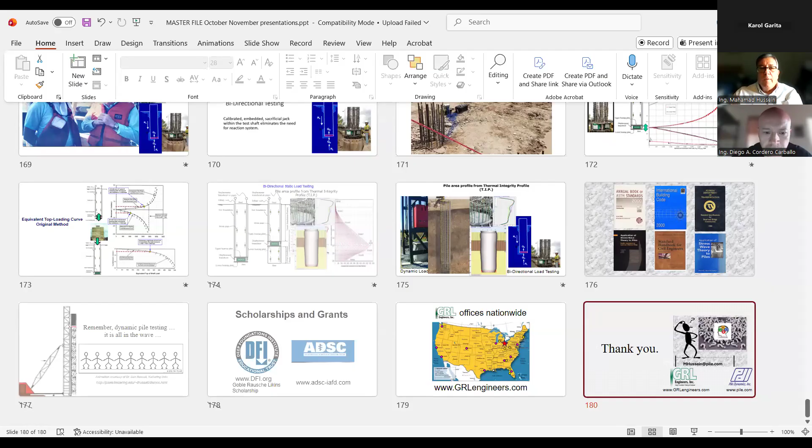Okay, thank you. There's another question. It says, thank you for your presentation. I would like to ask if there is any difference using the transient response method or PIT, measuring the hammer impact force and the pile head motion for evaluating the pile integrity.

Excellent question. The PIT method as I showed it, I showed it in the time domain, which means that the data shows the impact and reflection in time or in distance domain. The same data can also be analyzed in frequency domain, which is called the transient method. Basically, it is using exactly the same data to present it in two different ways, either in the time domain or in the frequency domain of the components of the measurements. They both give you the same information because they are both based on the same exact measurement, only presented differently, whether in time domain or frequency domain.

I hope I answered your question. Yeah, I think you did. And a last one, it says, test for lateral loads in piles in ports. I guess they're asking for information for lateral load testing. As far as I know, for lateral testing, static testing is the only test that is available. There is no dynamic test for lateral testing. And what is typically done is they take two piles and they test them against each other laterally.

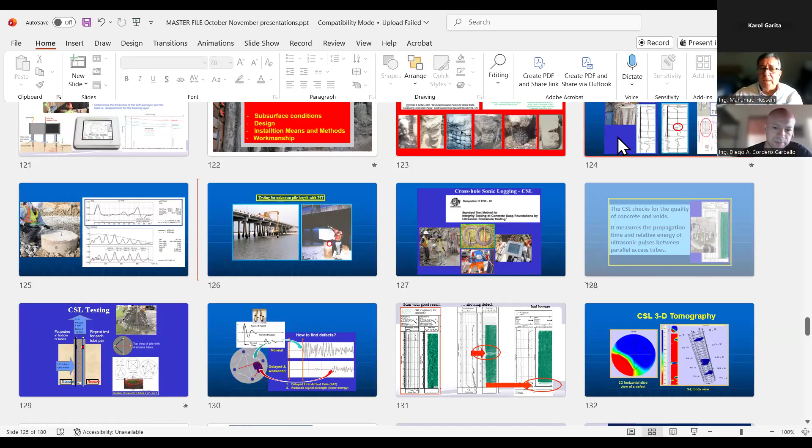Yeah, this is the impulse response, basically the PIT pulse echo method. So the impact and the reflection, the pulse response. That's typically what is referred to as a low strain test method, either by the time domain or by the frequency domain. But my understanding, this is what is referred to, is this low intensity impact, small handheld impact hammer test.

Okay, thank you. Okay, there's one more coming in. It says, using PIT for an existing pile, do you need access to the pile top, or can you perform the test laterally? What is typically done if you have a pile cap? You do not need access, although having access is best, but you do not have to have access to the very pile top, and you do not impact it sideways.

And this is one of the reasons I mentioned that you only have a 50-50 chance of having good data for this, because when you apply that impact up on top of the pile, the stress wave goes on any other component of the structure, as well as it reflects back and forth within that cap that will affect the measure on the pile. So even if you were to impact the pile itself, the impact will send a stress wave in the pile down, which is good. It will also send a stress wave up that rebounds from the elements and components above. That will affect the measured data.